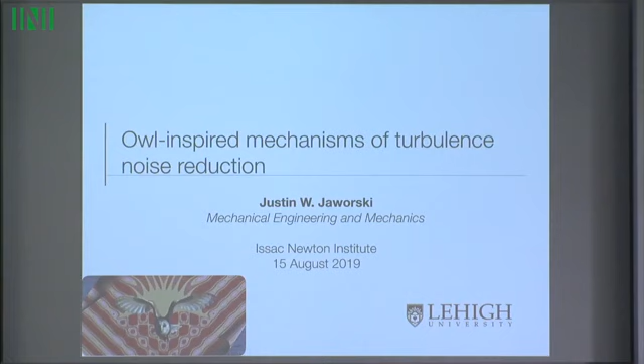I'm talking about turbulence noise reductions by owls, which seem like odd bedfellows, Wiener-Hopf and owls. But as I was in Professor Speck's lecture on Monday, they've been trying to tell us to use the Wiener-Hopf operator all along. We've just been spelling it incorrectly the whole time. So

I've been working on why owls are silent. I put silent in quotations because, of course, they make noise as they fly. But what are they doing to make themselves quieter in a frequency range that's of importance to us and to them? For them to be effectively silent, they have to not, of course, alert their prey that they're coming. So you have to think about the sensitivity of their prey, and that's quite keen around 2 kilohertz and above into the ultrasound range for us.

But the owls are quite sensitive in the 3 to 6 kilohertz range, and they do the targeting on the fly. So if you put them in a dark room, make noises on the floor, they'll correct on the fly for their prey. So for them, acoustic stealth means 2 to 6 kilohertz and above has to be suppressed to below threshold hearing levels. Okay, this has great implications for us.

I'm an engineer by training. For applications, say, aviation and energy industries, because it turns out we're quite keenly sensitive in that same frequency range. So if we understand it at the owl scale, that'd be great, and can we transition what we learn about that to other technologies? And just to show you on a log scale where we hear, this is about 20 hertz out to about 20 kilohertz.

I'm not sure I can hear quite that high anymore. That goes down with age. But peak hearing range is here, this dark gray. Here we have the peak hearing sensitivity for owls, and then the squeaks, rustles, and leaves of the prey in here. So there's kind of this critical range that overlaps between the owls and us.

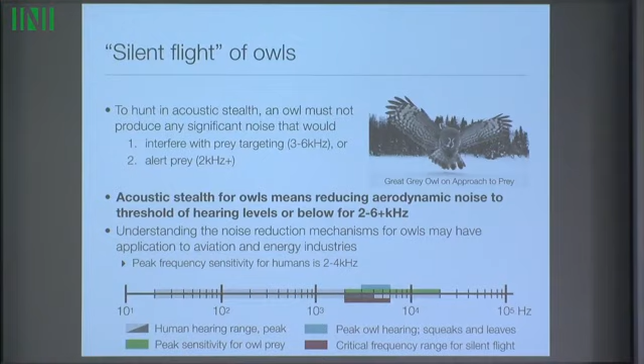So when I started this project some years ago, I was very skeptical that owls actually were silent flyers. And so I went not far from here to Huntingdon to actually listen to some fly by me. And I thought, since we're coming back from lunch and trying to warm back into things, let's play a video that does some qualitative comparisons of owls. So here we go.

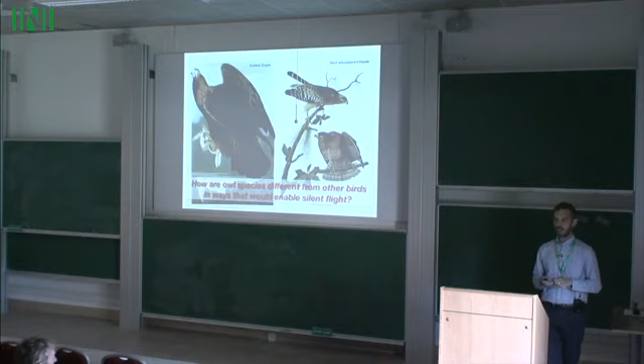For demonstration purposes, but the other birds have different features on their wings than owls do, and there actually have been some careful studies with actual live owls and other birds, flying them over acoustic arrays and just taking the wings themselves and putting them in wind tunnels and measuring the noise they make. So actually, it's the wings themselves that suppress the noise.

So what's different about the features of, say, owls and, say, other large species, raptors, that may enable their silent flight? And that's kind of where the focus has been, on the adaptations of the owls themselves and their feathers to reduce noise.

So I showed these images here because at Lehigh we have John Audubon's Birds of America, which some of you may be familiar with. But there's also an elephant folio, which are 4 large volumes. And John Audubon wanted to draw all of them in life size. So this is a massive book about this big, which is sized by the turkey. It was the largest bird they had. It was kind of crinkled in there. So these are here just to tie that back to the art inspiring the science.

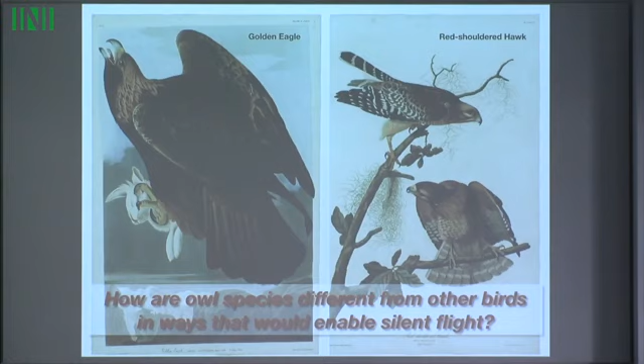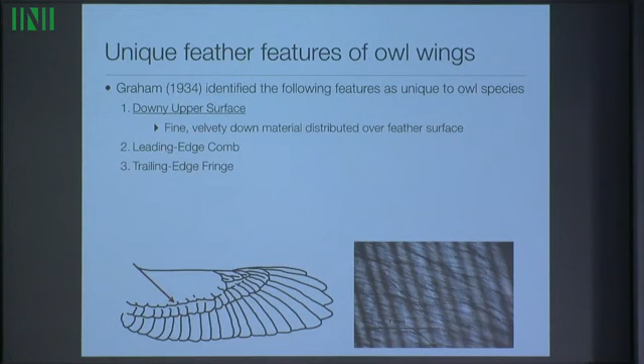Okay, so people have been chasing these features of owl wings that supposedly make them quieter for 80 years. Graham in 1934 identified in his short paper 3 unique features. One is this kind of downy upper surface on the top of the wing and all the feathers, and this feels like velvet. And if you look under a microscope, these were actually carried out first over in the Batchelor laboratory using Professor Goldstein's apparatus.

So what we've done here is take just a microscope, and then we're looking at planes or changing the focal depth. So if you look at the no penetration surface of the vane, which is just this surface of the feather, here's the impermeable base layer.

You go up a little bit higher, you see these trunks. These are called pennula. And then you go up a bit higher, you see that these trunks have little branches on them, and they overlap with the ones next to them. So what you effectively get is this suspended porous layer that's offset from the no penetration condition on the feather. And this pushes off the turbulence going over the wing by about 1 millimeter from the actual no through-flow condition on the surface. Okay, that's one.

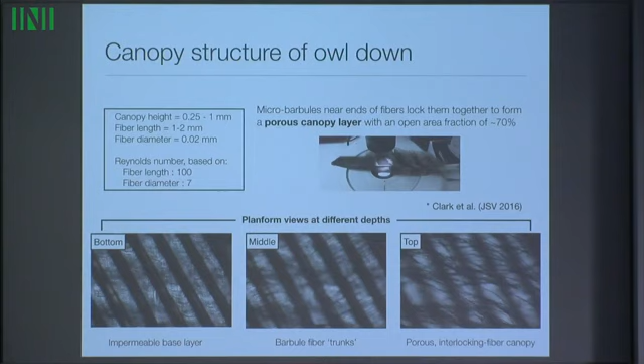Now there's a leading edge comb. This is probably the most oft-cited feature of the owl wings that people associate with the silence. This is a stiff array of fibers that go along the front. As an aerospace engineer, they look like vortex generators. One might think of it that way. And actually, the spacing of these fibers along the comb agrees with experiments for optimal drag reduction at low incidence.

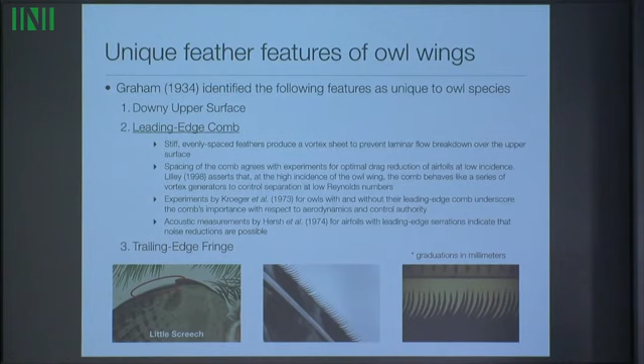There have been some experiments with live owls. They take these off, and they don't fly so well anymore, and they're a bit louder. So there's a coupled aerodynamic and aeroacoustic problem with the comb. There has been some other work with serrations and things of that sort, showing that noise reductions are indeed possible. There's also some recent literature supposing that this comb has something to do with the tip vortex that's produced and the noise associated with that. So that's an ongoing area of research.

And lastly is this trailing edge fringe. This will be the focus of our Wiener-Hopf approach. These are flexible filaments at the back edge of the wing, shown here with the barn owl. This is an area where you have a gradual mixing of the upper and lower flows. So instead of going from being over, say, a rigid impermeable plate to being in the pressure release region behind, you might have a gradual transition of this.

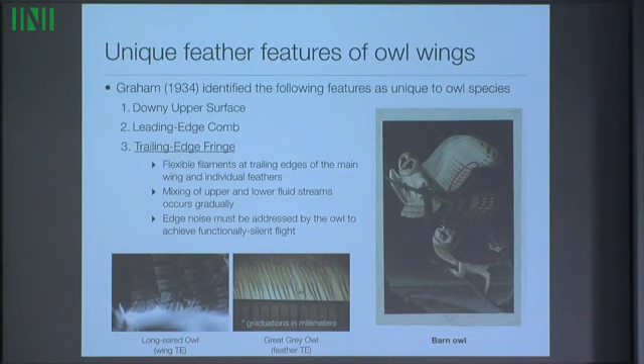Okay, so edge noise is a dominant noise source for a lot of applications, and also is a noise floor for a lot of applications. So for owls to be functionally silent, this is at least one thing they have to address, is to reduce that noise floor. So we've started out with this approach. So just for fun, we take all these things, we throw it on an aircraft, and it looks like this. So here's the future, but probably not. Because what we're going to do is take these features and adapt them in a useful way. We want all their benefits, we don't want any of their drawbacks. And so there's a trade-off between acoustic stealth and aerodynamic performance that's part of this problem, in my opinion.

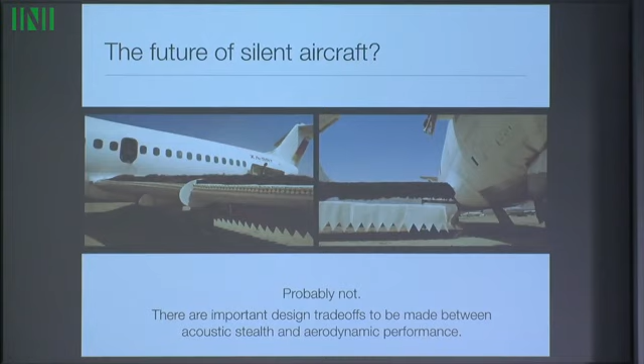And so I'm in the right country for this. This up here is Richard Hammond on one of his programs.

Okay, so the problem we're looking at now is turbulence generated by the boundary layer flow over the wing, and the noise that's scattered when it hits the trailing edge. Compared to conventional aircraft, we're modeling the edge as being compliant and porous, or poroelastic. We've seen various combinations of these in previous talks in this program. And the research goal is to look at the acoustic power. We know that the acoustic power scales as the 5th power of velocity, which I'll talk about a little bit later. And so we want to see if it goes to be a little bit weaker, like velocity to the 6th. That's actually by a power of Mach number. I add that exponent. So for small Mach numbers, this is getting quieter versus louder.

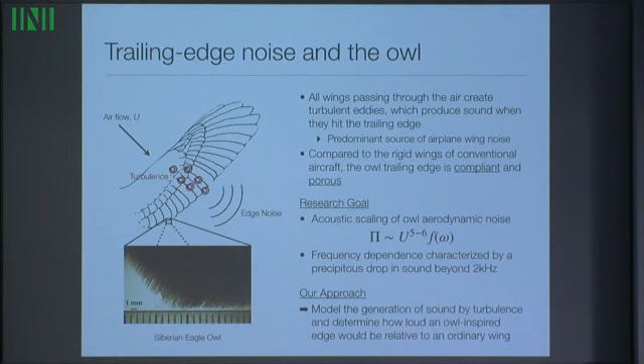And if you look at the data on noise produced by owls, there's this large drop that happens at 2 kilohertz. And that's where our hearing and their hearing is very sensitive. So the goal here is just to model with Wiener-Hopf the noise generated by turbulence hitting an owl-inspired edge and compare that to, say, an ordinary wing.

All right, so it wouldn't be complete without referencing the giants of the past and the present, I should say. So Lighthill, of course: instead of modeling turbulent flow, which is very complicated, we can represent that as a compact turbulent eddy in low Mach number flows. So we can just use it as a point source to look at our problem. Ffowcs Williams and Hall used Green's functions, actually from E&M theory, to show that the noise scales as the fifth power of flight velocity for a rigid impermeable edge.

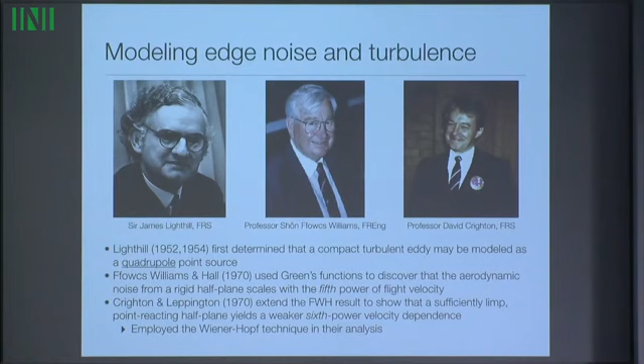And Crighton and Leppington extended this quite quickly afterwards to show that if you have a point reacting edge, in this case a porous edge for us, you can get a sixth power velocity dependence, so weaker by a factor of the Mach number. And he, of course, employed the Wiener-Hopf technique to do this.

So we're taking the physical problem on the left-hand side, quite complicated, and representing it in the modeling on the right-hand side. So we have a poroelastic, semi-infinite edge being excited by a turbulent source near the edge, and we want to find the noise in the far field. This, of course, is not what we do mathematically. We actually give it a plane wave here, find the solution very close to the edge, and apply the reciprocal theorem to get our solution.

And so I want to note folks here at the program that have done extensions beyond the semi-infinite edge and have really, in getting more solutions, actually developed the theory quite well for finite porous sections and poroelastic sections.

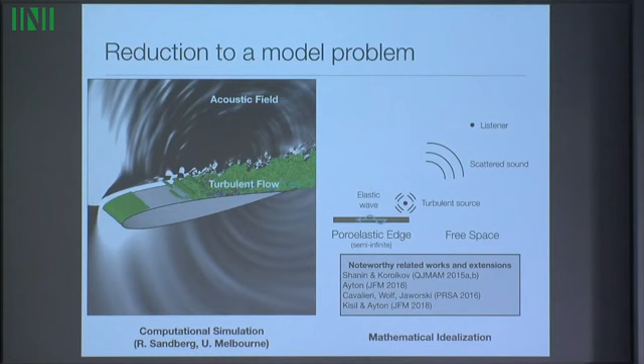Okay, here's our plate model we use. We assume that it's small porosity. This is the open area fraction, and that all the wavelengths are large compared to the feature sizes of holes. Okay, so it allows us to kind of average over those and give it an effective porosity.

So this is our plate equation, which we saw earlier on by Dr. Peake. And so if we have alpha sub h, our porosity, go to 0, we just get the plate equation. And eta sub a here denotes the inertia of the flow inside the pore. And so now we have a certain section, which is the plate being forced by the pressure, and then on the other side is the inertia of the flow inside the pore there.

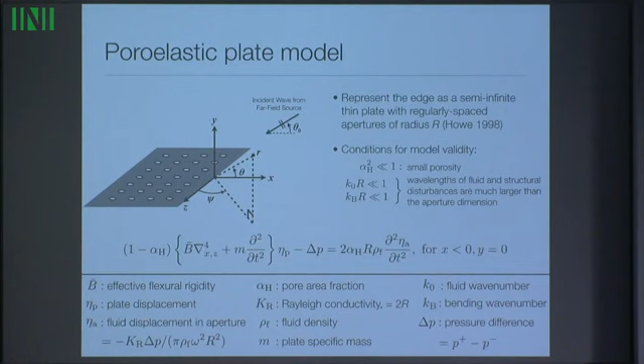Okay, so here are the equations we're solving. Here's our incident plane field for the reciprocal problem. Our kinematic boundary condition, so the normal flow matches the area average of the velocity of the plate and of the flow in the aperture. A porous plate equation, here's linearized Bernoulli, which relates the pressure jump to the jump in velocity potential, and of course we have Helmholtz equation.

Okay, we have the usual Sommerfeld radiation condition applied here, and this problem actually is described by two dimensionless parameters. One is the vacuum bending wave Mach number, which is related to the frequency like so, and then we have an intrinsic fluid loading parameter, which is dependent only on the fluid you have and the plate.

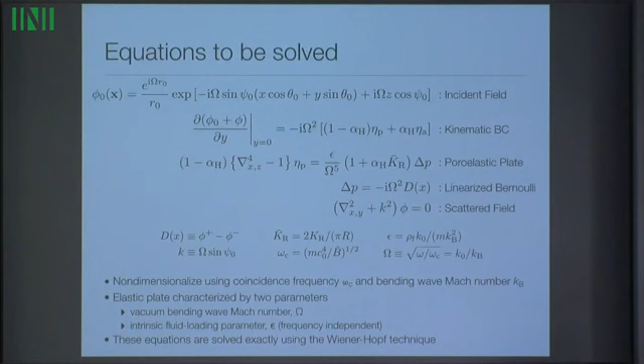Okay, so this is old hat by this point. We apply half-range Fourier transforms. We have a very classical kind of scattering problem. And the left-hand side up to here is the usual Sommerfeld diffraction problem. And then this other bit here is due to the porosity and the elasticity. Everything's color-coded here, so if we drop everything that's colored out, then we have the classical Sommerfeld.

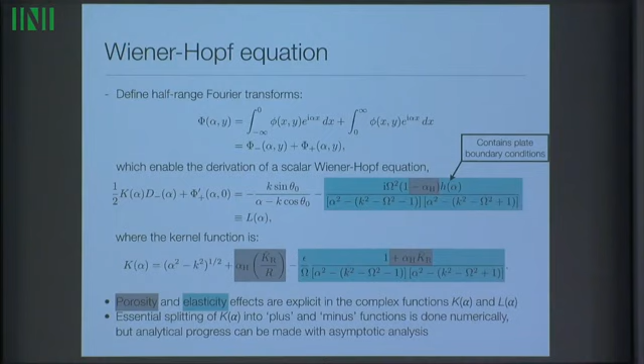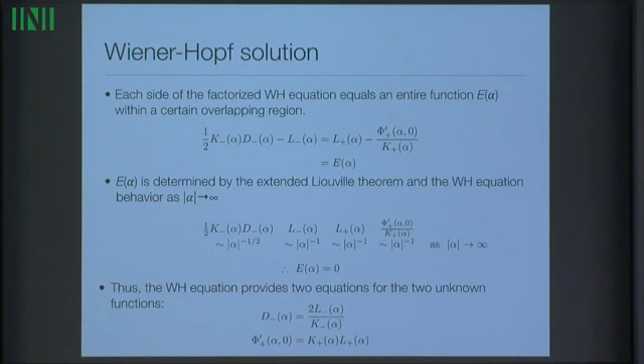Everything involving alpha sub h is due to porosity. And in cyan here, we see the complication due to the elastic waves inside the plate. Okay, and we see that here in the Wiener-Hopf equation as well as in the kernel. Okay, so we want to of course factorize these, and we applied the quote-unquote Wiener-Hopf magic from earlier this week, and our entire function is identically 0, and we get our solutions here. Very straightforward Wiener-Hopf, a scalar Wiener-Hopf solution.

We start out numerically in terms of factorizing our kernel. So we just pull out terms such that we get J of alpha, our transform variable, going to 1 as mod alpha goes to infinity. And we just choose our path here. This is easily done. We create a code, and then we just give it an alpha, and it spits back a result for that function. Later on, we'll talk about asymptotic splitting of the kernel in special cases that gives us more insight into the physics.

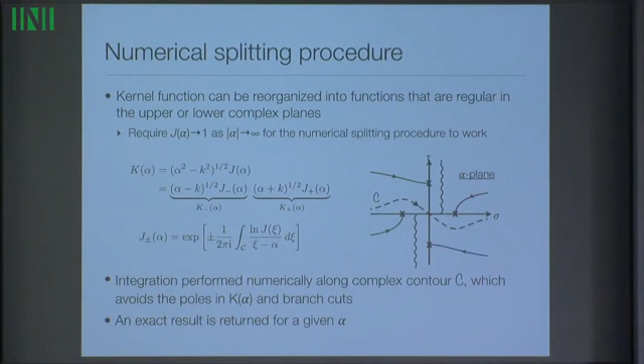I haven't talked about edge conditions yet. So on a plate equation, we have a biharmonic operator, but we can only specify 2 edge conditions. Right. So if we have a free edge, we have moment free and transverse shear free. And the remaining 2 conditions actually are determined as part of the solution.

So if we look at our solution here as H minus, which is analytic in the lower half plane in alpha, we have all these minus functions here except for this plus function kind of sticking out like a sore thumb, right? So this contains 2 poles in the wrong place. These have to become removable singularities, and that gives us 2 more equations to give us the 2 other unknowns, which are edge conditions not specified.

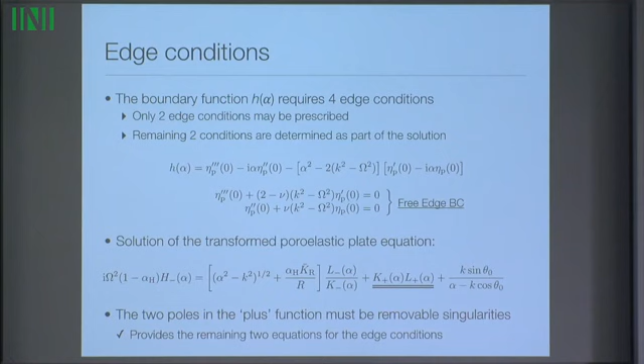Okay, so all of this gives us phi, our velocity potential, and this is all something you would have seen in Crighton-Leppington's paper in 1970. And B here contains all this mess involving the physics of our problem.

Okay, so at this point is where we say we apply the reciprocal theorem. So we want the scattered solution at some point. We just exchange subscripts, and we now have our solution due to a turbulent source close to the edge and measured far away from the edge. And our quadrupole we mentioned with Lighthill comes into play here.

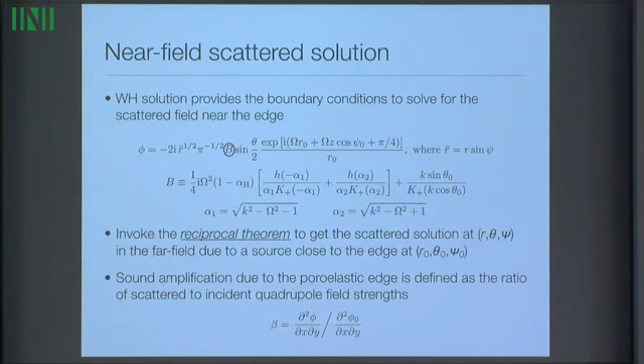Now we want to look at the amplification of the presence of the edge. Okay, so we look at the ratio of the scattered field due to the field without the edge and with the edge. Okay, we'll neglect directivity for now. Actually, there are interesting things that happen with directivity as you go from velocity to the 5th to velocity to the 6th. When you add porosity, it goes from the cardioid to being a dipole progressively. But just looking at the scaling behavior, we can just look at beta as this.

Okay, all we've done now is the acoustic solution. Right now I have to connect it to the fluid mechanics in some way. So now we define a characteristic velocity of the turbulent eddy and its length. So we get a frequency, a Mach number, and a wave number that comes out of all of that.

And now we can see our acoustic power goes like, again, leveraging Lighthill's result, this beta squared times velocity to the 3rd, that gives us power, times the Mach number to the 5th. So 3 plus 5 just gives us velocity to the 8th, which is the free field quadrupole we have from Lighthill. Okay, so this beta is going to knock down these powers of velocity as we change from rigid to porous to elastic.

Okay, so we need some parameters to start to look at this a bit. And actually, there was a nice set of experiments done by Michaela Herr at Braunschweig, and she looked at these elastic, flexible fibers on the edge of a rigid plate. And here's our open area porosity.

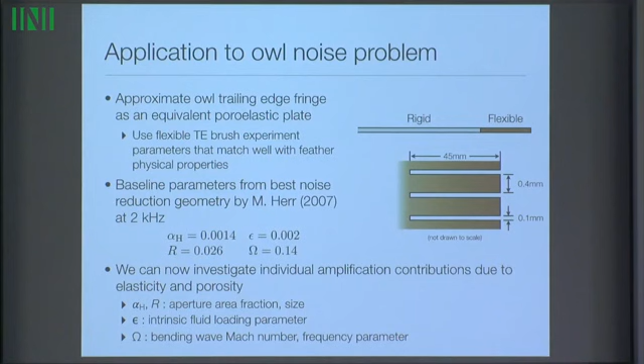This is probably the most important slide of the talk, so I'll take a bit of time to talk through it. Here we plot the log derivative of beta with respect to omega, our frequency, and this corresponds on the right-hand side to the acoustic power scaling with velocity. Okay, so in the rigid case, we have a frequency-independent velocity to the 5th scaling, as we'd expect. And here we just have the Boeing 777 just to indicate that.

If now we have it be rigid but porous, we have this black line. So at sufficiently high frequencies, velocity to the 5th is recovered. But as we go to lower and lower frequencies, porosity actually is excellent for reducing noise. Okay, and if we go now to elastic non-porous, we have this blue line where we have this new scaling like velocity to the 7th that occurs, which is quite unexpected.

Velocity to the 8th is when we have a free field quadrupole, and velocity to the 6th is when we have the scaling as if there's no edge at all. That comes from Ffowcs Williams. So if we have velocity to the 6th and above, there's no edge effect anymore. And poroelastic is somewhere in the mix there. This is the scaling, and on the right-hand side is the actual noise reduction. So 2 different things.

So look at this. This is relative to the rigid non-porous edge. So the porous edge gives you great noise reductions at low frequencies, as we talked about before. And as you go to higher and higher frequencies, it just rolls off and becomes effectively a non-porous edge.

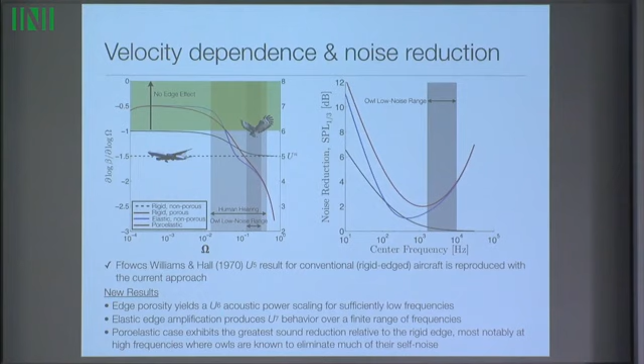Okay, so that's the numerical results, but can we do a bit of math to get some more insight into this kernel? No one really needs an introduction to this, but here's the warm-up of our Sommerfeld kernel, and lo and behold, we get velocity to the fifth, right? Frequency independent here.

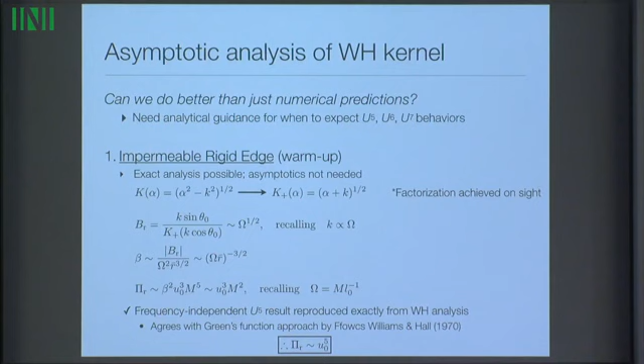And then in the other limit, where mu over k is large, you have this singular perturbation approach that Crighton and Leppington showed. So now we have an expression showing what the key parameter is, large or small, to get velocity to the fifth, which is when this parameter is very small, or velocity to the sixth when this parameter is very large. Now we have a physical connection between the velocity to the fifth and velocity to the sixth ranges.

And lastly, for the elastic edge, this is no porosity. We can show numerically here that if we look from here to the right and from here to the left, we can establish these bounds on velocity to the seventh behavior, that depend on the loading.

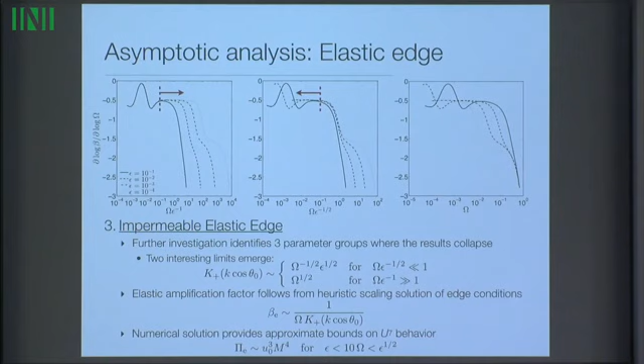So there's a misconception that all owls are quiet or silent. That's not necessarily so. And also their approach to their prey changes as well. So now we have pouncing and hawking of the smaller birds, and the larger ones go after larger prey like mice and voles. So there's a change.

One part of it is that our model holds for this case, which is great because we're interested in the silent flyers. But we have this hypothesis that going from non-compact to compact is associated with a foraging change in the owls, where silent flight is not essential. So here's a bit of a summary of what we walked through.

So the implication for owls: this is possibly weakening the scattering effect at the trailing edge. And we had this working hypothesis that the silent flight bandwidth, the acoustical compactness, and their foraging behavior are interlinked. Implications for aircraft: they actually use these for reducing noise on slats and edges. And there have been some extensions by folks here at Cambridge on finite and more detailed edge geometries.

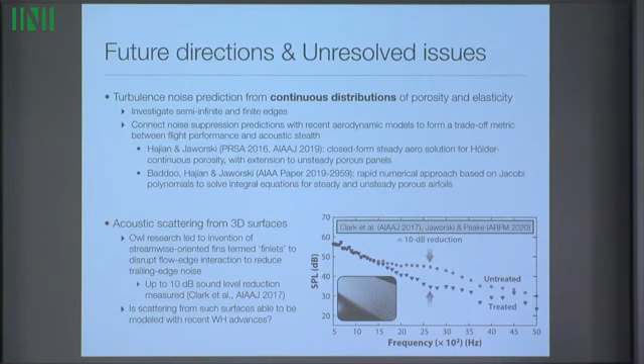Yes, so in low speed, yes. In wind turbines, the Mach number is quite low, so trailing edge noise is really dominating. For turbofans, where you have higher tip Mach numbers, probably not so. There may be a different range altogether.